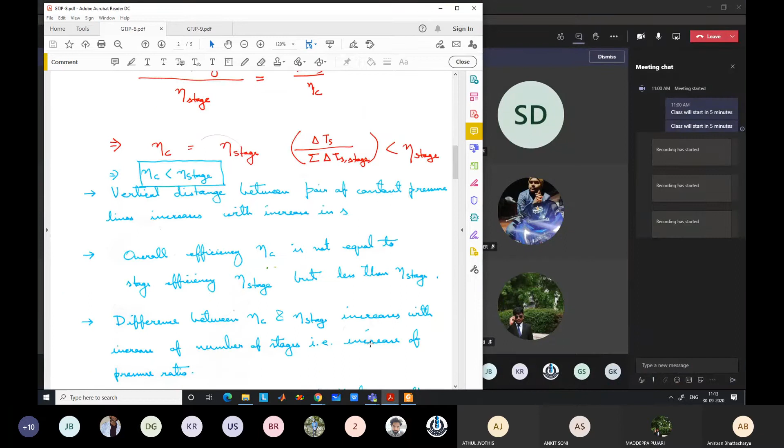Okay, so let us start. We have a lot to cover today. Going back two classes, we started discussing real cycles, and we noted the differences between real cycles and ideal cycles—8 points we noted, and we started discussing them one by one.

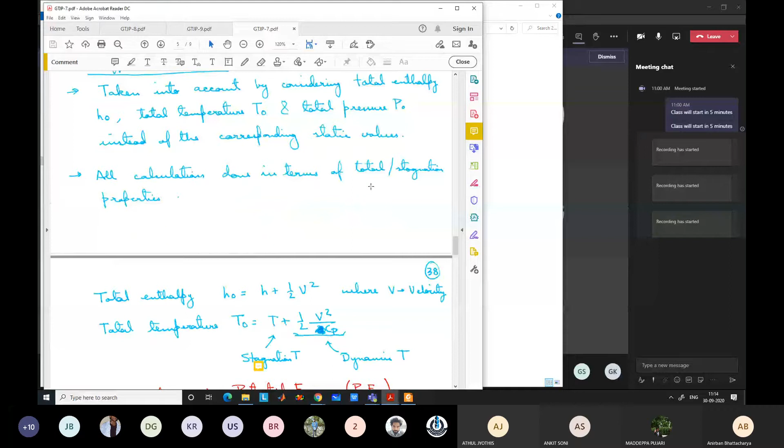The first point was that we need to take kinetic energy into account in the calculation. We do that using stagnation properties—temperature, enthalpy and pressure. Stagnation, or total properties, of enthalpy, temperature and pressure—instead of static properties, you just use stagnation properties for each of these problems.

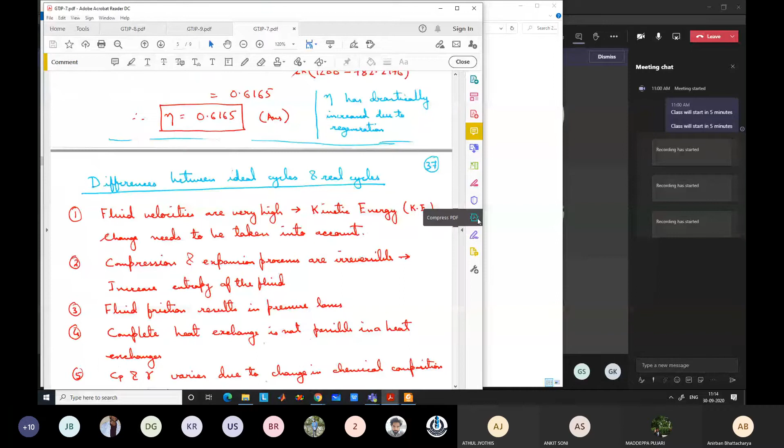The second and main difference was that compression and expansion processes were not reversible—they were irreversible processes, although still adiabatic.

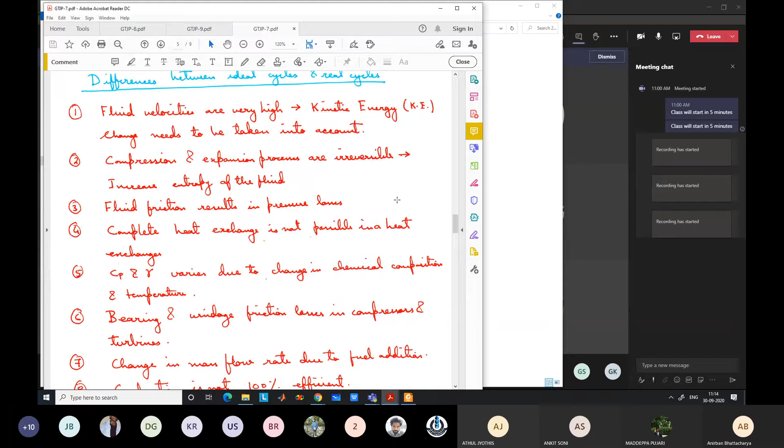For that, we noted that one way to account for this in the calculation is by defining an isentropic efficiency for the compressor and the turbine, like you've done in your thermodynamics course—isentropic efficiency of the compressor being the ratio of ideal work input to real work input, and isentropic efficiency of the turbine being the ratio of real work output to ideal work output.

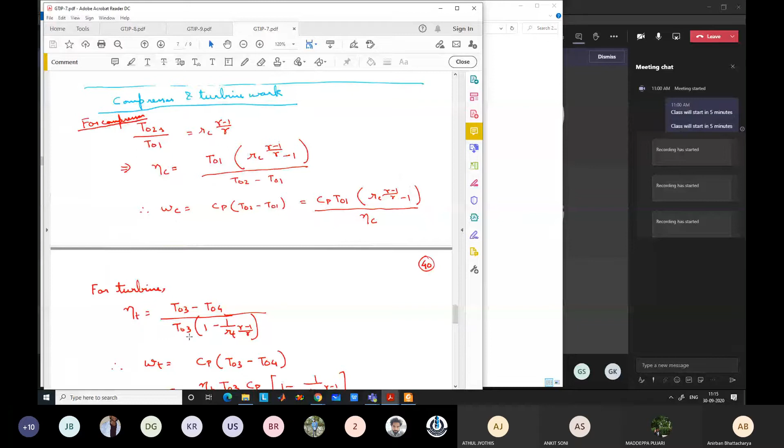Continuing this point, we noted there's another way to take this irreversibility into account: instead of defining isentropic efficiency, we can define something called polytropic efficiency. The reason for defining polytropic efficiency is that the definition of isentropic efficiency is fine if we consider a very small stage, meaning not much pressure difference occurs.

But if you consider a real stage, or a real compression or expansion process in a compressor or turbine undergoing a certain pressure ratio or pressure change, in that case the efficiency actually changes with increase in pressure ratio.

So the efficiency changes. For compressor, the efficiency actually decreases with increase in pressure ratio. For turbines, the efficiency increases with increase in pressure ratio.

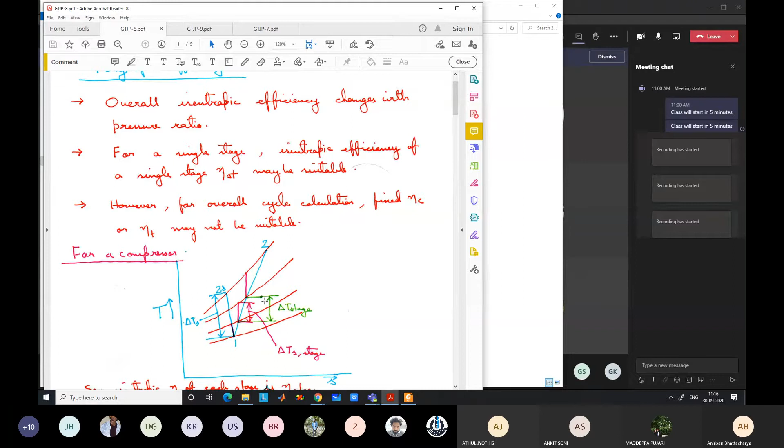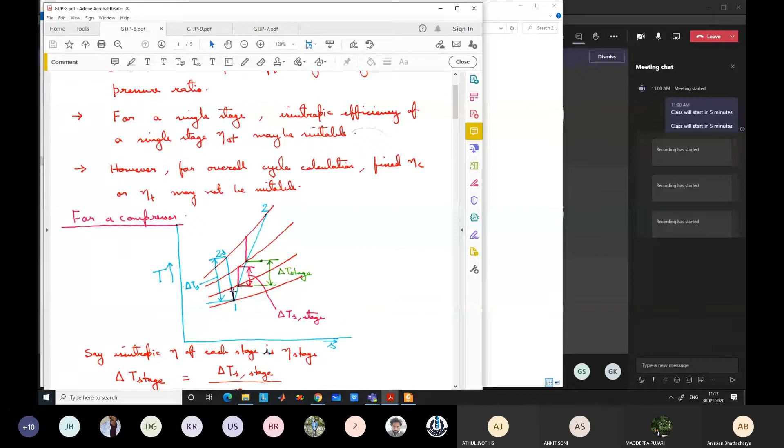This has to do with the fact that the actual line keeps on diverging from the ideal line in a TS diagram for the process, and also the fact that the constant pressure lines are diverging towards the right hand side. So accounting for these two things, we note that the isentropic efficiency of lower stages will be better.

For the compressor as compared to higher stages, as you can see from this diagram. So as a result, it is better to define some efficiency which is known as polytropic efficiency or small stage efficiency, which is defined as the isentropic efficiency. This is also an isentropic efficiency, for an infinitesimal stage taken anywhere along the process.

So as a result, this value by definition is constant. This efficiency is constant. It is denoted by this symbol eta infinity. For compressor, it is eta infinity C. For turbine, it is eta infinity T.

So this eta infinity does not change wherever you take. If you take an infinitesimal process near the bottom, that also will have same isentropic efficiency. If you take somewhere around the top, that also will have same efficiency. It is valid only for an infinitesimal pressure ratio.

As a result, it is defined as, for a compressor, ideal work input dTs by actual work input dt, not delta Ts delta T, but dTs dt — infinitesimal differential terms, dTs by dt.

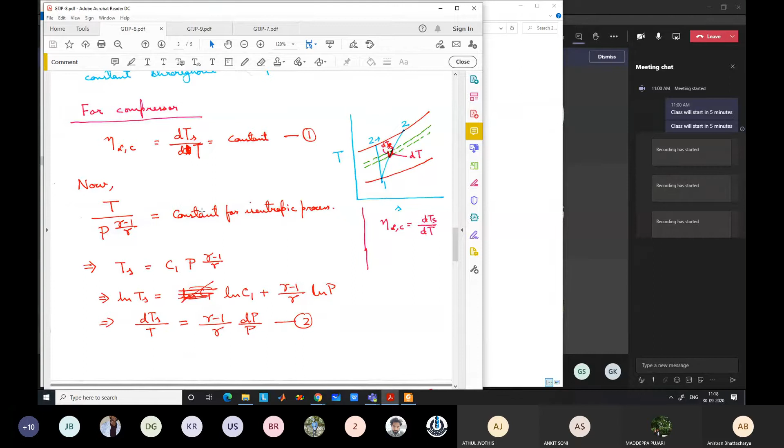So now, we have discussed this in the previous class. We will go through some calculations based on this and try to find some relations, correlations. You can try similar cases.

So for the compressor, or for any isentropic process, we know that T2 by T1 is equal to P2 by P1 to the power gamma minus 1 by gamma, or T by P to the power gamma minus 1 by gamma is constant for an isentropic process, where gamma is the ratio of the specific heats.

So we can write this for this isentropic process going from 1 to 2s. For this process, the temperature Ts varies as a constant C1 into P to the power gamma minus 1 by gamma. Instead of writing going from 1 to 2, we are just writing in a general form: Ts is equal to C1 P to the power gamma minus 1 by gamma.

So log of Ts is equal to log of C1 plus log of P to the power gamma minus 1 by gamma, which can be represented this way by taking out the power. If you differentiate both sides, you get dTs by Ts — ultimately this is just temperature, so the variable is temperature. So dTs by T is equal to gamma minus 1 by gamma dP by P.

And you can easily calculate the isentropic efficiency from the relation given here, T2S minus T1 by T2 minus T1. This is the overall isentropic efficiency of the compressor. So we want to relate this to the polytropic efficiency. Again, this is just algebraic calculation, so I will quickly go through this step.

You divide - sir, on the PDF that is on the right, yes, why like this, I didn't understand that step. It should be dTs by Ts, right, in equation 2, dTs by Ts. So Ts is like there is no variable called Ts - all the temperature variation, whatever change is occurring. So let me - it's a good question actually, what you have asked. How could we open it up, right, like we had done last time using your suggestion.

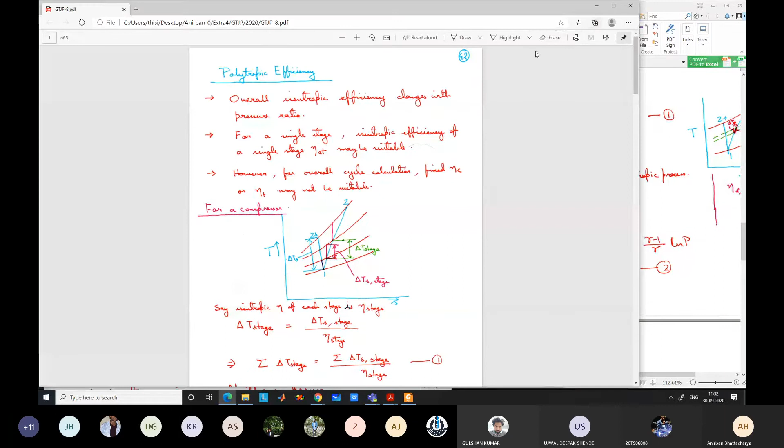So there is no variable called Ts. Although I am showing this dt as this line, actually dt is also a vertical line corresponding to this distance, and dTs is the vertical line corresponding to this distance. The variable is always the differential along this T direction is only dt, just to denote that the process is going in this direction. We are using dTs, but the variable is always T, temperature, in this direction. There is no separate variable called Ts.

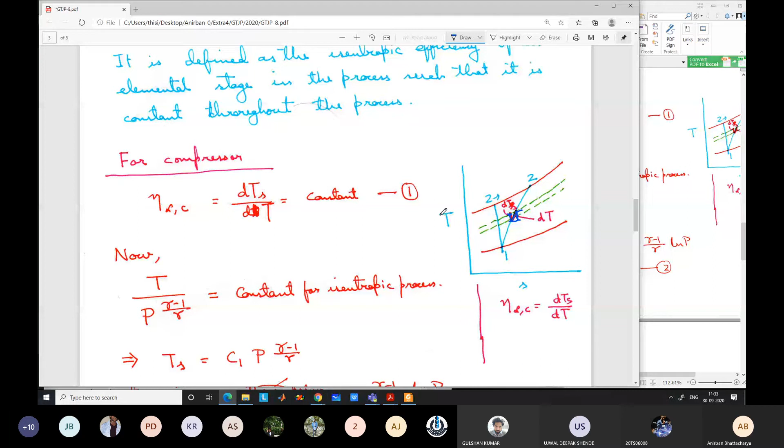So for one case, the change is dTs along the T direction. For the other process, the change is dt along the T direction. Both the changes occur along the T direction, meaning the independent variable is T, temperature T. The changes are different, it is dTs and dt, but the variable is T itself.

Yeah, okay sir, I understood. Yes, so it's the independent variable.

For example, if you have x and y, for x there can be defined variations in the x direction, so fx1, fx2, or f1x, f2x, different functions. But ultimately the distances traveled are different along different functions, while the variable itself is the x variable.

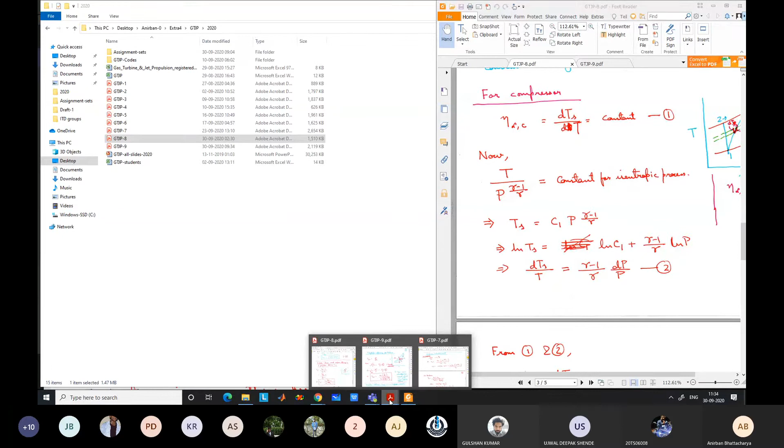Anyway, let us come to this, it's a good question. So just do some algebraic alteration: you take T1 common from the numerator and the denominator. So T2s by T1 minus 1, by T2 by T1 minus 1. T2s by T1 is P2 by P1 to the power gamma minus 1 by gamma, which we can also write as RC, the compressor pressure ratio. P2 by P1 is the compressor pressure ratio, and T2 by T1 we have already calculated. Here T2 by T1 is also RC, but RC to the power gamma minus 1 by gamma eta infinity C.

So replace this, and you get a relation between the isentropic efficiency and the polytropic efficiency, which also has the term pressure ratio. Now understand that for a constant polytropic efficiency, if we plot the isentropic efficiency for different pressure ratios, the isentropic efficiency will change, and I will show you how. It will decrease with increasing value of R for the compressor, for a given polytropic efficiency. We'll come to this - intuitively we cannot understand, but if you plot it, you will see that it varies with RC, the pressure ratio, the isentropic efficiency.

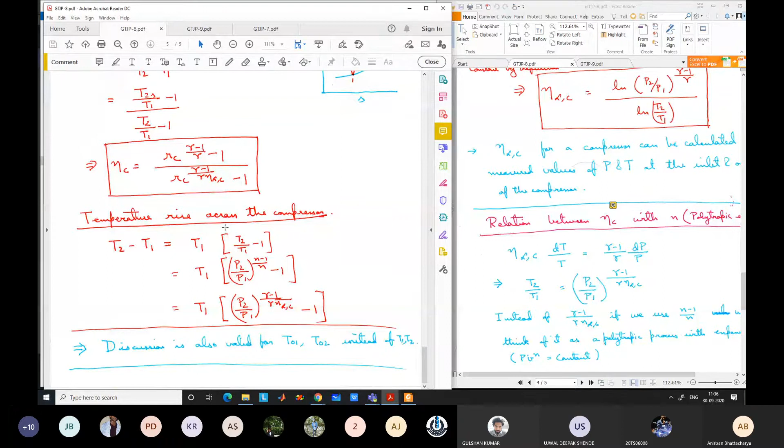The final point we want to note is the temperature rise across the compressor. Again, these are just for the sake of correlations we are showing; in the actual calculation you can always go step by step. Actual temperature rise across the compressor is important because it gives us the measure of work input. So this is T2 minus T1, which is T1 into T2 by T1 minus 1. You just replace that by RC to the power gamma minus 1 by gamma eta infinity C minus 1. So this is the pressure ratio, and it again has the polytropic efficiency in its term.

So a few correlations we have seen for the polytropic efficiency. One is how it is related to real actual properties at the inlet and outlet. Second is how it is related to the polytropic exponent. Third is how it is related to the overall compressor isentropic efficiency. And fourth is how we can calculate the temperature rise or work input - Cp into this T2 minus T1 is the work input to the compressor, so you just multiply Cp and you get the work input to the compressor in terms of polytropic efficiency.

Whatever discussion we have done here is also valid if you use T01 and T02 instead of T1 and T2, and in the problems we are going to tackle later, including what I have given in the assignment - let me just check the assignment problem - I think we have used T01 by T02. It means everywhere it is T01 and T02.

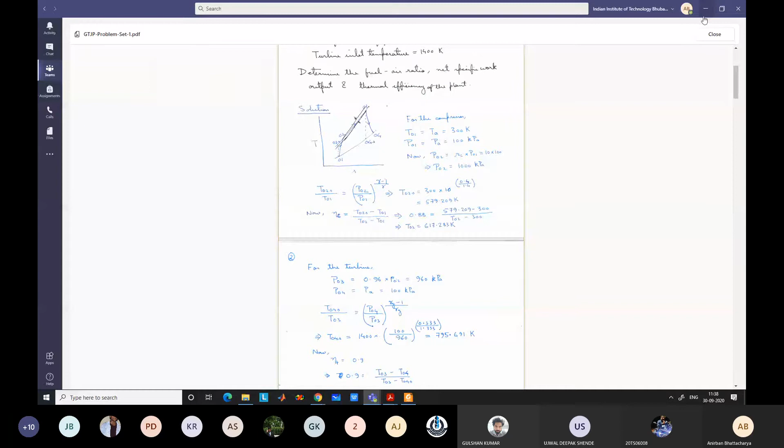So the same thing whatever we have discussed for the compressor - the definition of polytropic efficiency plus these four steps, how it is related to the polytropic exponent, how it is related to the isentropic efficiency of the turbine, how it is related to work output from the turbine, and how it is related to inlet and outlet temperature and pressure - all these things can again be calculated and defined for turbines also. We will quickly go through the same things again. Any questions up to this point?

Otherwise, let us proceed for the turbine. So for the turbine also, polytropic efficiency is defined in a similar way. It is the efficiency of an infinitesimal stage, the isentropic efficiency of a very small stage, but it is defined in the opposite way.

If you see the expression for compressor, it was dts by dt. Now it is dt by dts, because the work output from the turbine is less than the ideal work output, or the temperature change from the turbine's actual process is less compared to ideal temperature change. So that's why efficiency value has to be less than 1. So it is defined in this way: eta infinity t is equal to dt by dts.

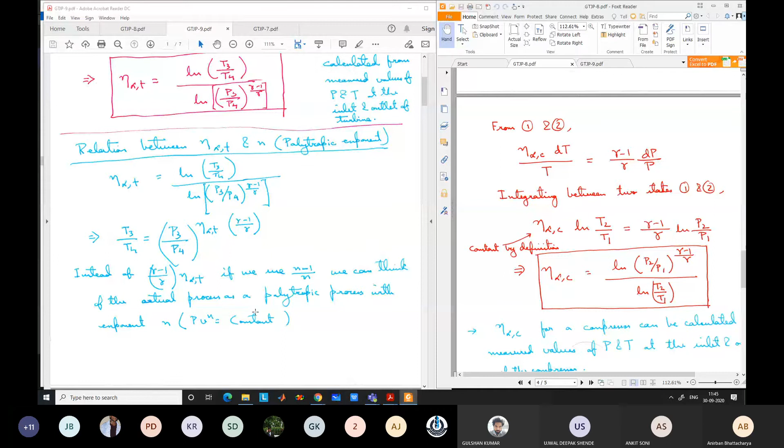Again, you take the same expression here, and using this we can write T3 by T4, just a different way of expressing the same thing. T3 by T4 is equal to P3 by P4 to the power eta infinity T, gamma minus 1 by gamma. You are just expressing the same thing by removing the logarithm. So instead of eta infinity into gamma minus 1 by gamma, I can use n minus 1 by n, where n is the polytropic exponent. So we can think of this process again as a polytropic process, PV to the power n as a constant. Hence T3 by T4 is P3 by P4 to the power n minus 1 by n.

And how is this polytropic exponent related to the polytropic efficiency? It is related in this way: eta infinity T, gamma minus 1 by gamma, is equal to n minus 1 by n. Or you can write it differently: eta infinity T is equal to n minus 1 by n, into gamma minus 1 by gamma, inverse.

So if you know eta infinity T, you can find the polytropic exponent. This polytropic exponent n is different from the polytropic exponent n for the compressor. It has a different value, it is not the same. Although we are expressing it as n, both these n's are different, and the expressions are also different, as you can see here. Here the expression is somewhat opposite: for the turbine it is n minus 1 by n into gamma by gamma minus 1, while for the compressor it is n by n minus 1 into gamma minus 1 by gamma. So this exponent is different, but this is how you can relate them.

So again, how will you find the polytropic exponent n? First, you have to measure the temperature and pressure at the turbine inlet and outlet. Then you have to calculate the polytropic efficiency. Then you will have to use this relation to find out the polytropic exponent n. This n is different from that used for the compressor.

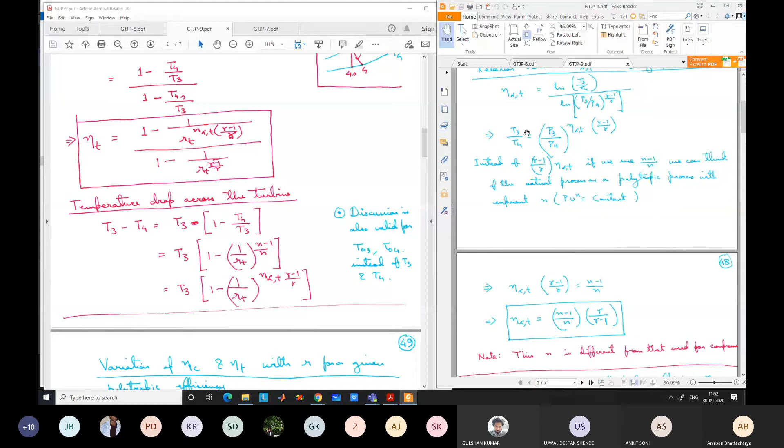If you plot these two curves, one eta t for a given value of polytropic efficiency, and eta c for a given value of polytropic efficiency, using the same value of polytropic efficiency for turbine and compressor, because it depends on the finishing process.

For both cases, you will see that for the compressor, with increasing pressure ratio, the actual overall isentropic efficiency decreases, while for the turbine it increases. These are some hypothetical or reference values, it does not mean these are always the exact values. Typically the turbine efficiency is higher compared to compressor efficiency, and it can go up to 90%. The compressor efficiency typically is somewhat lower.

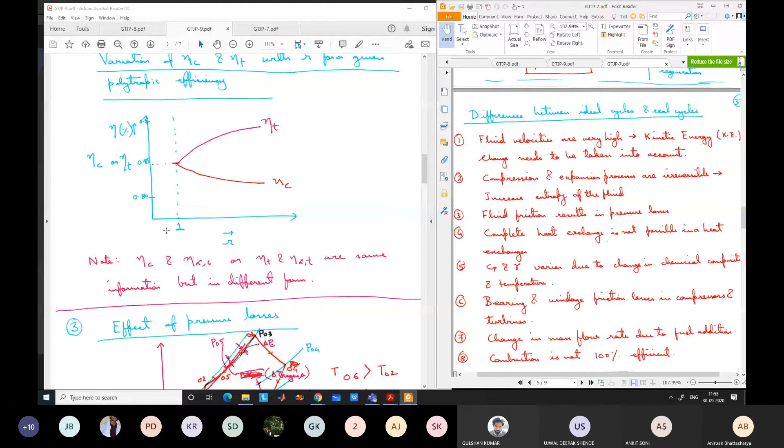So we have seen only two points, but the most important points we have covered in detail. First, the kinetic energy effect. Second, the effect of irreversibility, which we covered using isentropic and polytropic efficiency. All the other points are relatively minor compared to losses due to the compressor and turbine, but they cannot be ignored, though their relative contribution is slightly lower. After the break, we will see the effect of all the other losses step by step.

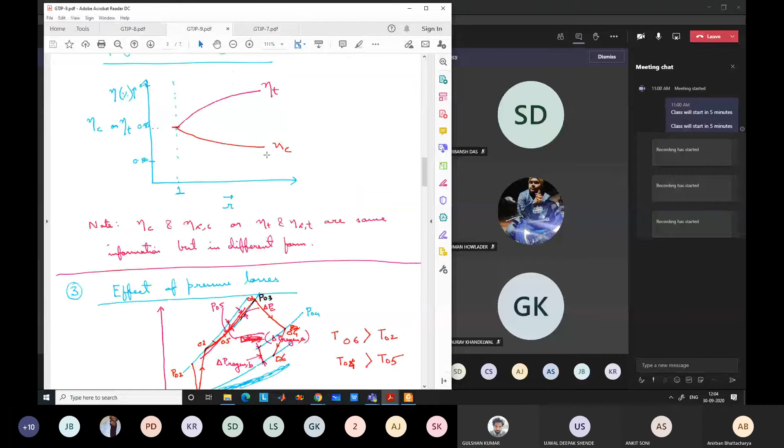Let us continue this discussion. So today we will try to go through the other minor effects.

And all the minor differences, and in tomorrow's class we will try to solve one or two problems related to this on design calculations of real cycles. Ideal cycles are very easy, you have already done them. Real cycles are also not difficult, but how to incorporate these changes, such as given pressure losses and other things, into a real cycle is what we will solve tomorrow, and similar problems are also in the assignment set. For this type of problem, for real cycles, please follow the process that I follow in class, or what is given in the assignment sheet, or in El Sayed Ahmed's solved problems. Don't follow the process given in Ganesan, which is much more simplistic, taking a lot of assumptions and as a result not accurate. They don't take the fuel air ratio accurately and other things accurately. Those calculations are okay as approximate calculations, but since we can do it in a more accurate way, we should do it in a more accurate way. So we will follow that process, like whatever I follow in class, not the Ganesan way. For ideal cycles, you can follow Ganesan's problems or Saravanamuttoo.

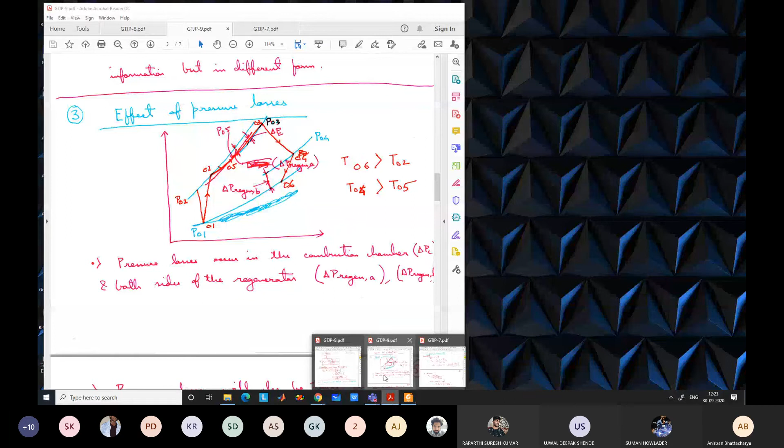Let us continue, we have lost a lot of time. So we were discussing about the pressure losses. Any other pressure loss also you can take into account.

So what will be, how it is done is that the pressure losses at each point is given as some delta pressure, meaning there is a pressure loss of 5 kilopascal, something like this is given. So if you know what is the pressure loss delta P regen A, and if you know what is the exit compressor pressure, okay, I will open this now.

If you know what is the exit compressor pressure, then from this pressure losses you can find out what is the turbine inlet pressure P03, because P02 minus delta P regen A minus combustion pressure loss will give you turbine inlet pressure. Turbine inlet pressure is an important term, needed for the calculation. Similarly, other terms also, turbine exit pressure also you can calculate if there is a regenerator. So same way you can take into account any other pressure loss.

So in most cases it is generally given, the pressure loss is generally given as proportion of the inlet pressure to the device. For example, generally the pressure loss in the combustion chamber, or yes, tell me.

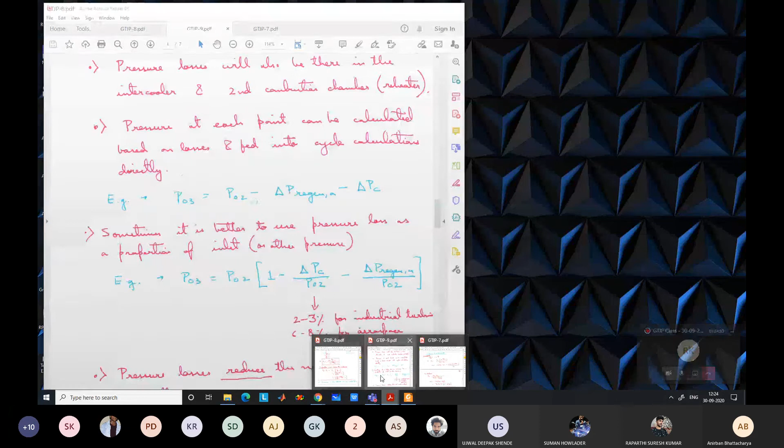Seems like you are not sharing the PDF. Oh, okay. I was sharing, but why it was not visible? Again, I am sharing back. Can you see it now? Yes, sir. Or is there a lot of lag? Maybe there is a lot of lag.

I am showing an equation of pressure. If you can see on the left hand side, on the right hand side I still have that diagram, the TS diagram of the cycle with the pressure losses. So in case you get confused.

So typically what happens is that this pressure loss is given as some percentage of the inlet pressure. For example, pressure loss in the combustion chamber is given as say 3% of the compressor outlet pressure. In that case it means that delta PC is equal to 0.03 of P02.

So in that case you can easily calculate. P03 is equal to P02, if you take common, 1 minus delta PC by P02 minus delta P regen A by P02. So this ratio is generally given, and this pressure loss is typically 2 to 3% for industrial turbines, as the combustion chambers do not encounter high velocity. For aerospace application, this may be slightly higher, 6 to 8%, depending on the design, because you encounter higher velocities in the combustion chamber.

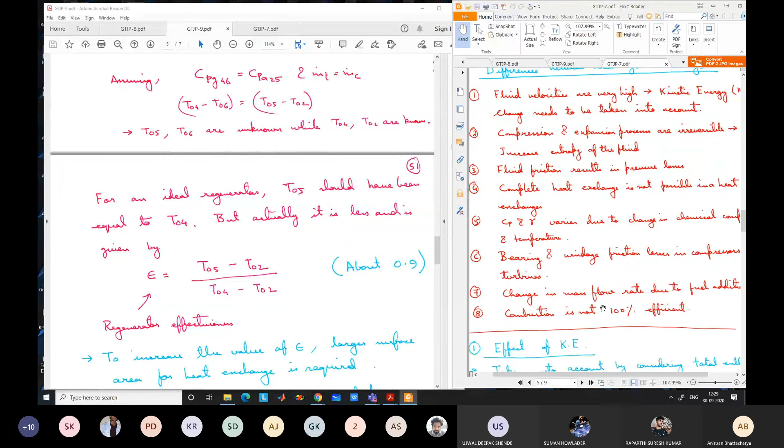So what happens in the regenerator is, ideally, we should have gone from 02 to the temperature T04, equal to T04. But actually we cannot reach that temperature because of losses. We reach a temperature which is below T04. So if we want to reach the T04 temperature, meaning the turbine outlet temperature or exhaust gas temperature, we would need a surface area which is infinite, or an infinite time of heat exchange, which is not possible.

So we had defined the regenerator effectiveness as the actual temperature rise T05 minus T02, divided by the ideal temperature rise T04 minus T02. This is there in your old notes. If you go back a few classes, I think it will be there somewhere. Yes, here, okay, regenerator effectiveness.

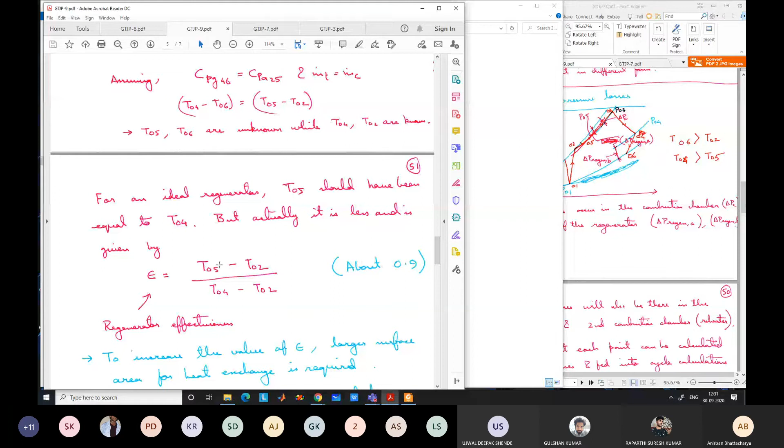So if you know what the regenerator effectiveness is, typically about 90%, you can easily calculate T05 because T04 will be known to you. T04 will be known based on the turbine calculation. Once you calculate T04, you can calculate T05 by using the regenerator effectiveness.

In the regenerator, the energy balance gives you: mass flow rate in the turbine side, m dot T, for the gas side in the regenerator, this is delta P regen, gas side. So m dot T into Cp of gas, which will be different as we will see later, into T04 minus T06, the temperature change in the gas side, is equal to the mass flow rate in the air side, m dot C, the compressor mass flow rate, into Cpa in the air side, into T05 minus T02, delta T in the air side. This is the energy balance.

If you assume that Cp is constant and mass flow rate is constant, ignoring the fuel flow effect and Cp variation, you get T04 minus T06 equal to T05 minus T02. So once you calculate T05 from this expression, since T02 and T04 are already known, you can also calculate what T06 is. What is the exhaust, the final exhaust temperature T06, you can calculate from this energy balance.

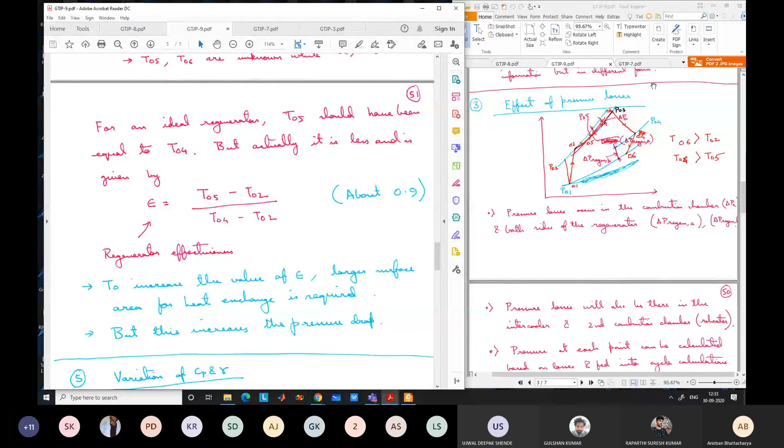So this is the fourth point. This is how you have to take this into account. Any questions on this point?

So let us go to the fifth point: variation of Cp and gamma due to composition and temperature. This variation of Cp and gamma can be very complex.

Cp varies with temperature. Typically in gases, does Cp increase or decrease with temperature? It increases. Why does this increase? Can anyone say from a fundamental perspective? Although it's not important for our course, does anyone know why?

Cp is a function of enthalpy. No, fundamentally, what is happening physically, not in terms of maths? What does Cp mean? It means the heat required, if you want to change the temperature by delta T, what is the energy input? Yes, at constant pressure.

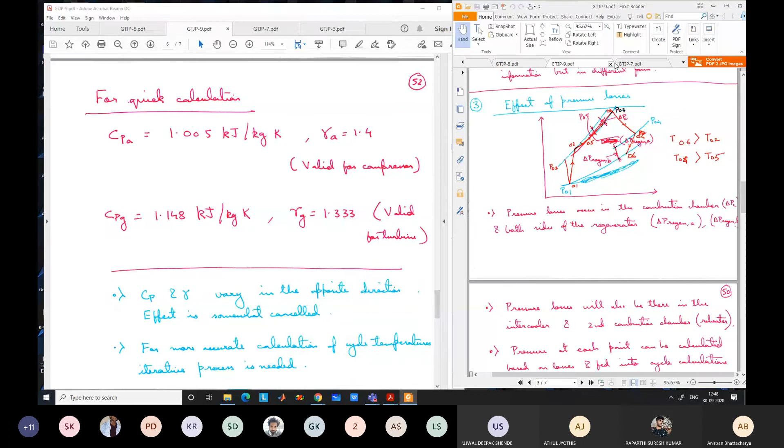When we calculate the compressor work, Cp into T2 minus T1, that Cp we will take as Cpa. And when we calculate the turbine work output, Cp into T3 minus T4, we will use Cp gas into T03 minus T04. It will be clear once we solve the problem in the next class, or you can take a look at the assignment problems I have given in the problem set.

So then there are some other minor things. Most of the important things we have covered. What are the minor changes?

One is the mechanical losses, which are losses due to friction in the bearing, as I discussed a couple of classes back. The rotors are mounted on discs, which rotate, mounted on the shaft. The shaft is a massive, single cylindrical object mounted on bearings.

So there are frictional losses due to the bearings, a very small amount. Then there is windage loss, which is also a type of frictional loss. Windage loss occurs when the discs rotate and have frictional loss with the surrounding static air, in between the turbine disc and blade and the casing. This entire loss is of the order of less than 1%.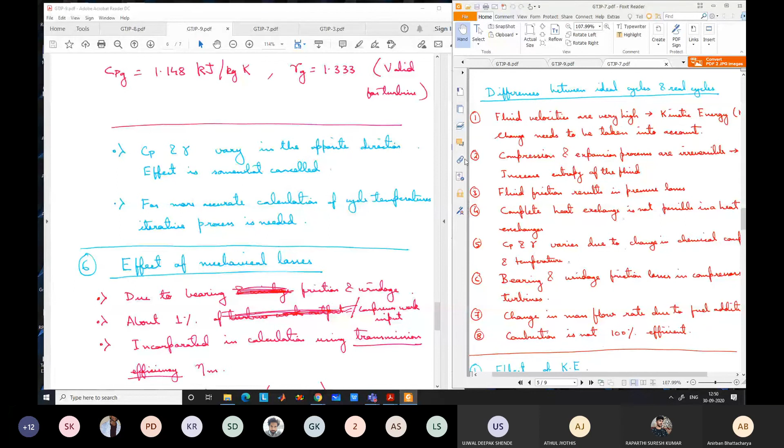1%, and this we are calling mechanical loss - meaning 1% of the compressor work input. How do we take this into account? We define another efficiency called transmission efficiency or mechanical efficiency, eta m.

So ideally, what would have been the work input to the compressor? It would have been Cpa, or Cp of 1 to 2, into T02 minus T01. But because of losses, you need more work input, because the work being transmitted from the turbine, some of it gets lost due to this friction.

So you are transmitting some work from the turbine, a small amount, 1% of it is getting lost due to friction, and the work that is reaching from the turbine to the compressor through the shaft is slightly less. So the actual work input that you need to the compressor from the turbine is slightly greater, and that is defined as 1 by eta m into the ideal work input CP of A T02 minus T01.

WC here is the work that you are extracting from the turbine for running the compressor, which is slightly higher than the work that is reaching the compressor, given by this term 1 by eta m. Eta m has a value around 99%, so 1 by eta m has a value around 1.01 - around 1% more work will be required to be transmitted from the turbine.

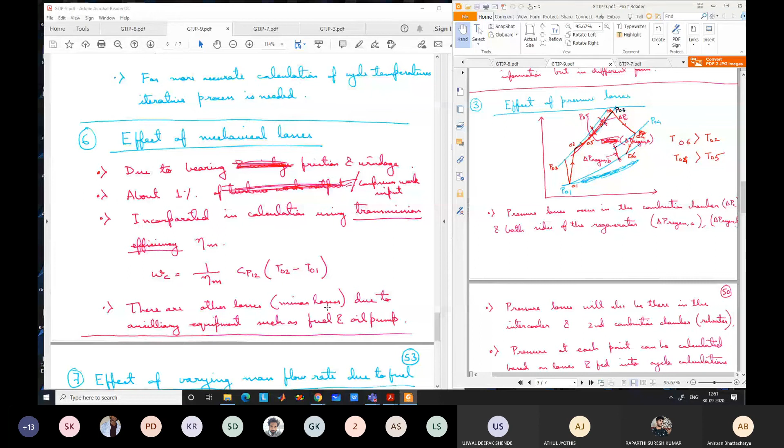There are other minor losses due to ancillary equipment, extra equipment such as fuel pumps. You have to inject the fuel - there are small pumps that inject the fuel at high pressure. Then there are oil pumps - oil means not the fuel, it means lubricant. You have to circulate the lubricant, so there are pumps also for circulating the lubricants.

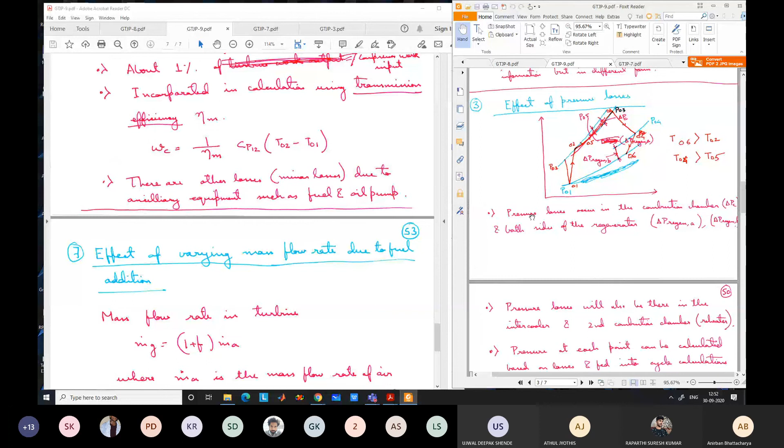These also take up some small amount of work output, either through auxiliary electricity that is generated from the turbine's net work output itself. But these are very small - we do not consider them in this course. So this is one minor change that you have to consider, and we can account for it easily by using a transmission or mechanical efficiency. You have to calculate the work input like this.

Then there is another small change, which is the effect on the mass flow rate due to fuel addition. Why am I calling it a small change? Because if you remember, we use a very lean mixture in gas turbines.

Do you remember what is the reason for this? We have discussed this. Why do we use a very lean mixture in gas turbines as compared to IC engines? IC engines use a near stoichiometric fuel air ratio. In gas turbines, instead of 1:15 we use 1:50 or 1:60. What is the reason? Can anyone say?

So that the flame doesn't blow out because of high velocity... sir, overall temperature of the combustion chamber is maintained.